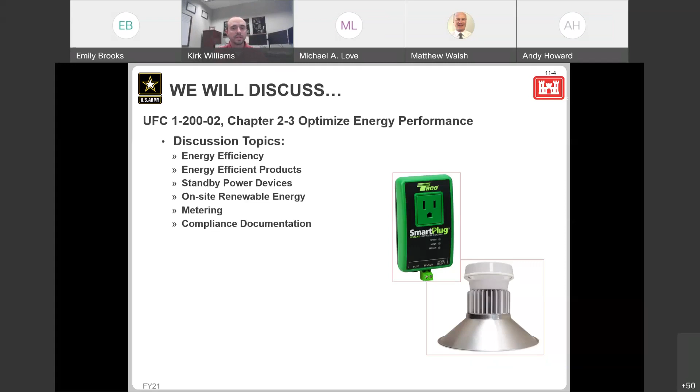Okay, so we're going to jump into the UFC, primarily Chapter 2-3, where we're going to optimize energy performance. So some of the topics that we're going to discuss today are energy efficiency, energy efficient products, standby power devices, on-site renewable energy, metering, and then also a real brief conversation on compliance documentation. There's actually going to be another presentation on documentation, so we won't go in a real deep dive on this, but there is some specific energy compliance documentation that I thought would be helpful to have as part of the energy presentation.

So some interesting facts about the government and our energy usage. Offices, hospitals, supermarkets, and other facilities like that account for nearly half of all the energy consumption in the United States. And that cost for those utilities is around $300 billion per year. And it's more than any other sector of the economy.

These are coming from Energy Star and FEMP, so some of the data is coming from there. Out of all the energy, often up to 30% or more is wasted through inefficiencies. Improving energy efficiency is the single largest way to eliminate waste. And with more than 350,000 energy-utilizing buildings and 600,000 vehicles, the federal government is the nation's largest energy consumer.

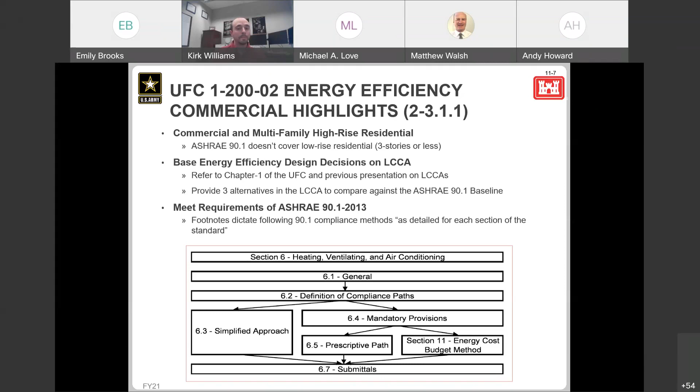Okay, so this is probably the one that people are most familiar with out of the UFC, where we state that we're going to design to achieve at least 30% energy consumption reduction. And then the statement that a lot of people are familiar with is if a 30% reduction is not life cycle cost effective, we're going to modify the design to achieve an energy consumption level at the highest level that's life cycle cost effective.

And so sometimes we're dealing with buildings where it's really difficult to get 30% savings. They're a really simple building, or they have a process that is difficult. It's a high bar for some facility types. And so we have the path around that says, if you can't hit this metric, then you're going to do your LCCAs, which we're already doing, and you're going to choose your method that gives you the most energy savings to try to comply with that.

I just want to point out a reminder from the ER on LCCAs and energy modeling that states where you have similar performance between alternatives, you select the most economical, as well as a reminder from the ECB on LCCAs that says when you're selecting alternatives for analysis, give a preference to features and systems with lower complexity and maintenance burden. So sometimes this can be a little bit of a gray area to try to balance all three of these.

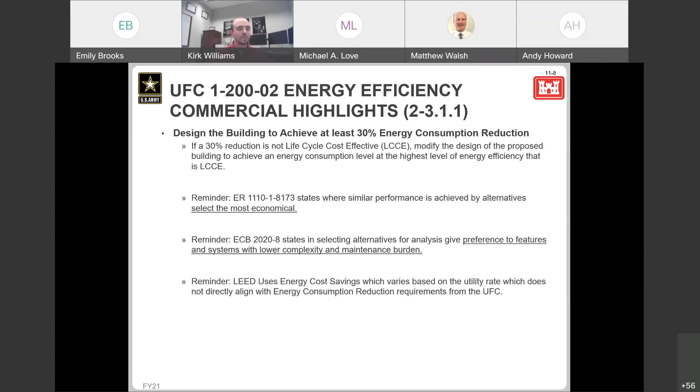So as we're continuing in the UFC here, a lot of people are familiar with this one. It says that we're going to use the performance rating method for determining our percent energy reduction over the ASHRAE 90.1 baseline. And so our UFC actually gives us an equation to use. So that's always fun. Just wanted to point that out for those of y'all that might be new to the federal government, that there is this equation here that when you're doing your UFC compliance reporting, you would use this,

which is more or less taking your receptacles and process loads out of it to kind of reflect a different value. This is another area where the government is going to differ from LEED. LEED is going to include your receptacle loads in the analysis. So there will be differences between the reporting of those two. So once again, I said you'll hear that about every slide here. There can be a difference between your UFC reporting and your LEED reporting.

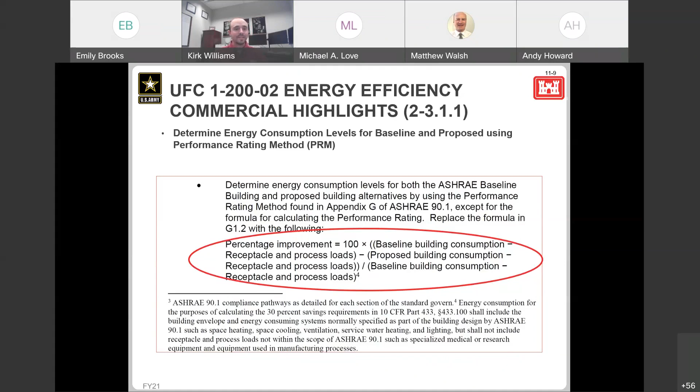Okay, so I think it's helpful when we get some real world examples. So I went into some old projects and I pulled some data out of Trace. Unfortunately, that's what you get when you give an engineer presentation, is you get data. So sorry for those that like pretty pictures. So on this one, just kind of wanted to point out.

So the top one is a report out of Trace. It's your energy cost budget / PRM summary. A lot of people are familiar with this, and I just highlighted the total consumption, noting that the units of this are 10 to the 6 BTUs, I believe. And so they're actually a pretty large value. And then the one on the bottom is actually the same energy modeling software output summary for LEED. And that's where it actually points out our proposed economic cost improvement over the baseline. So that's what would relate to our number of credits that we would achieve.

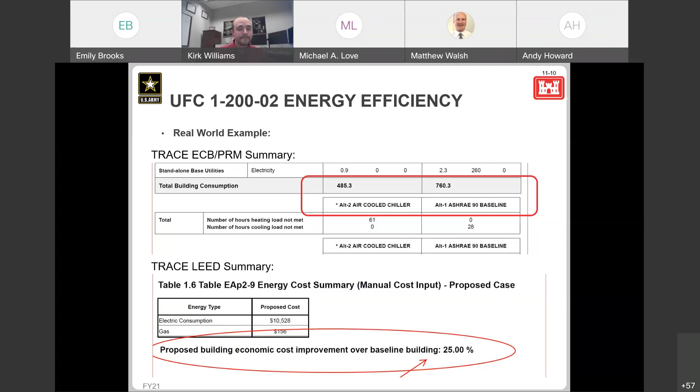So I went ahead and pulled, this is actually that ECB PRM report, the whole one. And I just went ahead and circled a couple of things. Here you would see where we have the receptacles. If you remember back to that PRM equation, we talked about receptacles getting pulled out in relation to the total building consumption. So to not get into the math, it wasn't real jazzy math. If you backed out the numbers, you would see that this building was, by the UFC method, 45% energy consumption reduction. And then with the LEED energy cost savings, we saw that we were 25%.

So this is where I'm really trying to drive home that if you're at a planning charrette or some other kind of function or venue, selecting that you're going to get 30% energy savings on LEED is going to be a very different output than what you might be getting from your UFC. So just because the UFC says you're going to be doing 30% reduction, or the maximum life cycle cost effective, doesn't necessarily mean you're getting all of those points with LEED. So talk to your energy modeler, talk to your mechanical, talk to your PDT.

Hopefully people are informed about that, but I've come into multiple projects in-house and AE where we kind of started with that assumption and then kind of had to be the bearer of bad news of, no, we're not going to get you 12 to 15 points or credits on this. We are going to be getting you more like 6, a lower value. And so that can be a big deal when you're planning your third-party certification compliance. So just kind of wanted to point that out there. Hopefully everyone's gotten that.

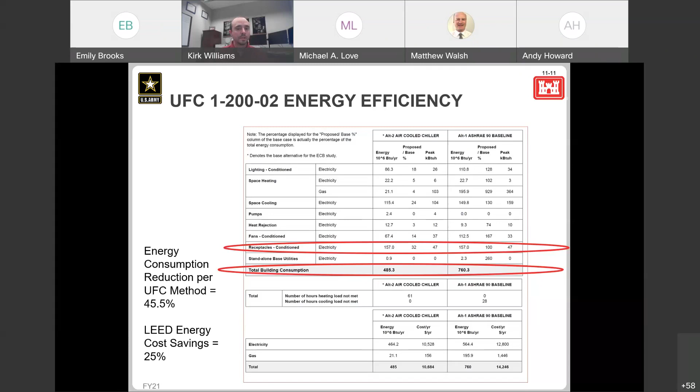Okay, so we're gonna keep diving into the commercial. So we're going to determine our consumption levels for the baseline and proposed using the performance rating method. So there's a little bit of a difference between this. Sometimes people can get confused with the performance rating method and the energy cost budget method. Those of y'all that live in energy modeling or 90.1 compliance have probably come across this.

Energy cost budget is a modeling method. It's actually section 11, and that's a method that you would use for showing compliance with 90.1. Appendix G, or the PRM method, is actually if you're going to show that you're achieving energy savings above and beyond 90.1. So they are actually different. There's some differences, as you can see on the statements that I put on here. The PRM method builds on top of the ECB method.

Those of y'all that have done any kind of energy modeling for LEED, they drive home compliance with Appendix G requirements. LEED reviewers are really good about making sure your baseline is fully compliant with Appendix G. They will give you plenty of comments if you fail to do that. We know firsthand. So just some things to note with that.

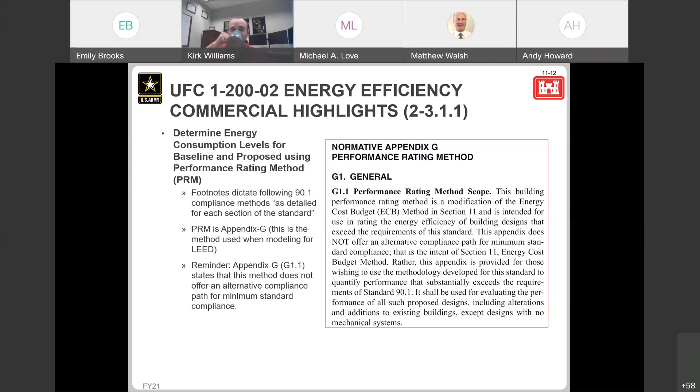So now we'll jump into a real high-level overview of the residential. We talked the UFC mandates for the commercial, so now we'll touch on the residential real quick. So to meet the requirements of the residential, and just a reminder, this is 3 stories or less, and typically involves a dwelling unit, which gets into your classification spaces. You're going to follow the International Energy Conservation Code. So we wouldn't be using 90.1 for this necessarily, because 90.1 says that it doesn't cover low-rise residential.

I just put a note in here that sometimes we get into a strange criteria crosswalk issue with large barracks that are 3 stories or less. So sometimes we have AITs, UEPHs, and things like that that aren't actually high rise, but are pretty large residential. And so you get into some strange comparisons when you actually start using the IECC, which is more geared towards low-rise residential. You can think a house, but you're dealing with a barracks that's hundreds of thousands of square feet, and it makes getting apples to apples comparisons a little difficult. So some of that might live out there for some of these.

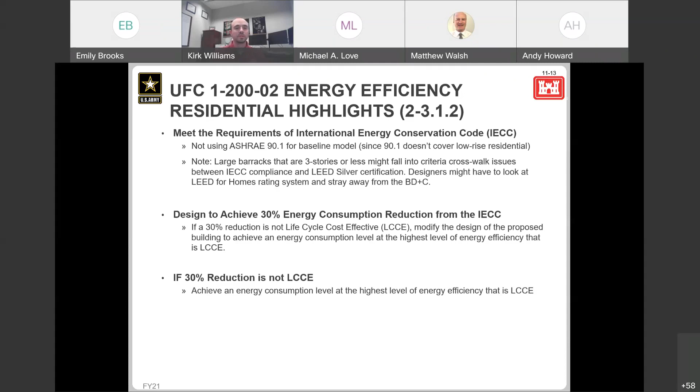So we're going to see a pretty similar requirement here to design to achieve a 30% energy cost consumption reduction, but we're going to be using the IECC instead of 90.1 on this. So pretty similar statement, just different criteria. Once again, we have the same caveat with life cycle cost effectiveness, where we're going to do the highest energy efficiency that's life cycle cost effective. If a 30% reduction isn't cost effective, then you're going to just choose the highest level of energy savings that you can.

Okay, so that was a real high level on residential. Next, we're going to talk renovations, and this one's kind of an interesting one as well. As a lot of y'all are probably familiar with renovation work, there's kind of an infinite amount of variety with the scopes on renovations. So to start with, the UFC says if you're replacing everything above the foundation, you must apply either the commercial or multifamily high-rise residential, apply the low-rise residential, and achieve one of the compliance methods previously discussed.

So more or less, it says if you're going to replace everything from the slab up, if you're going to rebuild this thing, you're going to follow the 2 methods that we used for the new construction. It makes a little bit of sense because you're getting into that deep energy retrofit kind of scenario. So that's what you're looking at. And then for all other renovations, you're going to choose one of the following options.

You're going to reduce your measured building energy use by 30% below a 2003 metric for the baseline, or you're going to reduce your building energy use by 20% below a 2015 metric. So you have kind of a difference there. Or you're going to reduce your modeled energy by 30% compared to 90.1. So that one looks kind of like what we had in our commercial there.

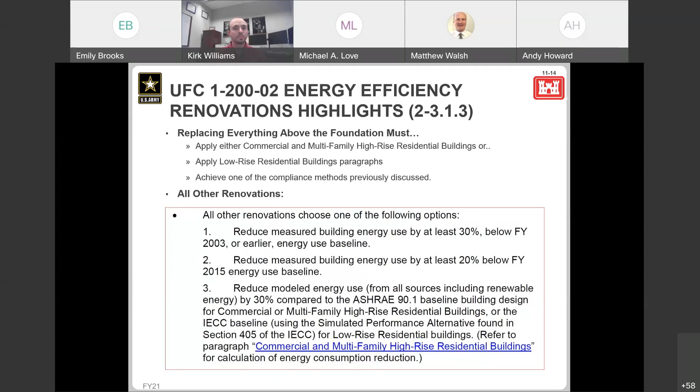Okay, so that covered most of the energy efficiency that a lot of people are familiar with. The 30% energy savings, the big key one that people think of when they think of the UFC and the energy compliance that goes along with it. Now we'll touch on a few of the other ones. So the first one, and this one might look familiar to y'all that attended the water presentation, is we're going to get energy efficiency products. So we're going to get products that are Energy Star qualified that meet the FEMP designation for energy efficient products.

So I actually put links on the slides here for Energy Star and for the product list from the Department of Energy for the FEMP. And then I thought this was kind of cool that broke out the federal government's energy and water use by consumption fuel type from 2020. So if y'all like to nerd out on data and graphs, I have those moments every now and then. The FEMP website has a lot of information on that. They also actually have some pretty cool tools on there.

I came across an alternative water source map. If you were there for the water presentation, we talked alternative water. And they actually had a tool that shows different alternative water source available locations. They have a water harvesting calculator. They have a tool for economic viability for PV, wind, battery. So there's some tools out there. I am wary to promote too many tools because, at the end of the day, our LCCAs are required by policy, and we have the requirements that are there.

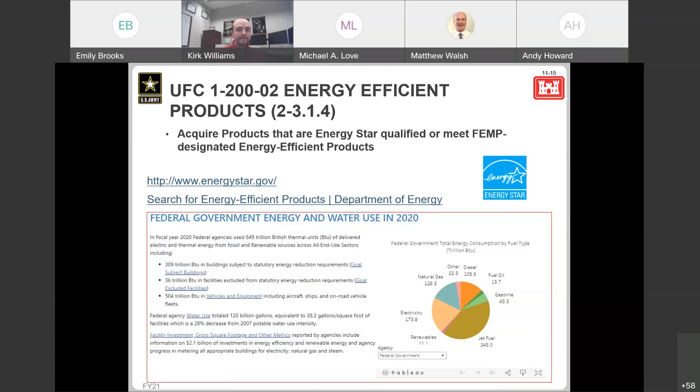And my mic, is it getting any better? Hey, can y'all hear me? Yes, sir. Okay, good. Sorry, I was using my work phone and my reception went to 0. Sorry about that. So let me get the presentation back up and we will jump back into it. Sorry for the technical delays. Okay, sorry about that. So hopefully y'all are with me and we can pick back up here. We'll take the technological issues in stride. Let me know if we have any other issues. Hopefully the Wi-Fi will hold out here and we won't have any other problems.

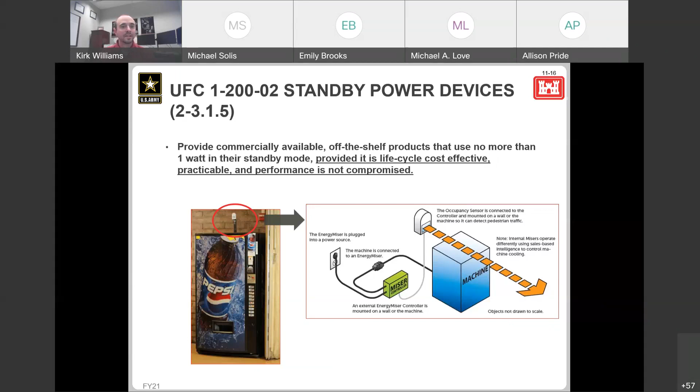So next we'll jump into on-site renewable. So this is one we're gonna park on for a few minutes. A lot of people probably have come across this. This is kind of like the 30% energy savings. There's a lot of content here. So our UFC says we're gonna provide on-site renewable energy, and we're gonna follow the IGCC, so the former ASHRAE 189, but we're going to do it where life cycle cost effective.

So that's where it's going to get interesting. We have this criteria that says, if you were doing ASHRAE 189 or IGCC compliance, you would normally provide for on-site renewables. And there's a variety of definitions that go with that. A lot of people think PV, but there are other renewable sources on site that go along with that. And then specifically, you get down into it, and it says for Army projects, if it's not life cycle cost effective, that you're going to plan on-site renewable energy systems for future installation of on-site renewable energy systems. And so that can get kind of fuzzy on how to implement.

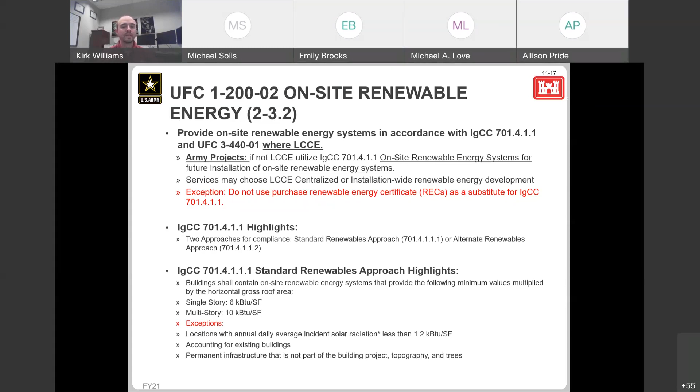If you're accounting for an existing building, and then permanent infrastructure that's not part of the building project. And so there's some exemptions in there. I'd say, probably look at that and weigh it with your project. There's some tools out there that'll help you figure out your average incident solar radiation. I'll say NREL. They have some maps out there. There's some other resources out there, so you can find that data for tracking on your locations.

So jumping into the other method now, the alternate renewable. This one's going to look pretty similar to the standard renewable approach. Your difference here is that you're only required to do a marginally lower value of on-site renewable per square foot. And what they do is they say you're going to provide equipment that meets certain minimum energy efficiency ratings. And there's an appendix, there's a water heater, and then there's the Energy Star requirements.

So a lot of these are probably things that we're already doing on our projects, because a lot of times we're going for LEED, we're going for energy savings for UFC compliance. So we may already be rolling some of these criteria in. So you might end up with a lower on-site renewable. So I wanted to point that out to y'all, that there's two different methods, and if you're doing really energy efficient equipment, you might be well served to look at this alternate approach.

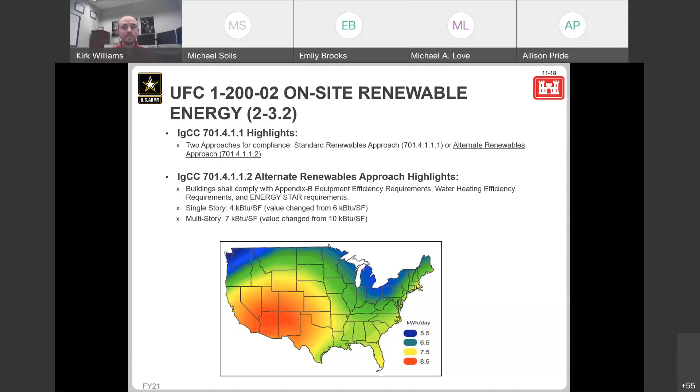I will say if you get the distinct privilege of getting audited, if you've only looked at 30%, they will ask you about some other percentages. So just recommend that. I believe our team looks at 60 and 80 to get some other metric points to compare for the analysis.

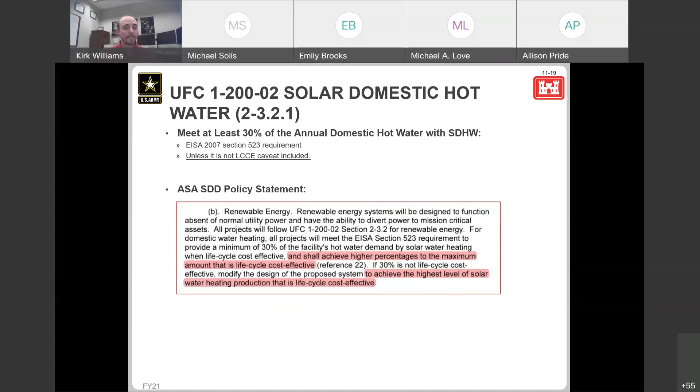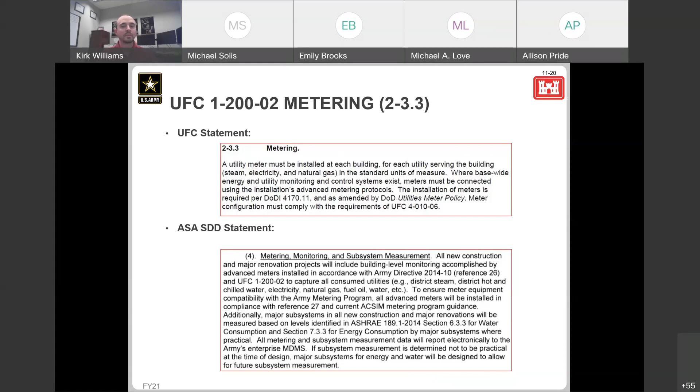I will say, with the metering, we should be getting what we call an advanced meter. So it shouldn't be a rotary dial. It should be something that can do some data points. It should more or less be a digital meter. There is the DoD meter policy. I put the link on the slide here. And then a big important point is cybersecurity. So don't provide a backdoor, don't let your building get hacked through the water meter. That would not be popular. So you do your cybersecurity, include that in there, and communicate with your installation on the metering and their policies and work to have that implemented.

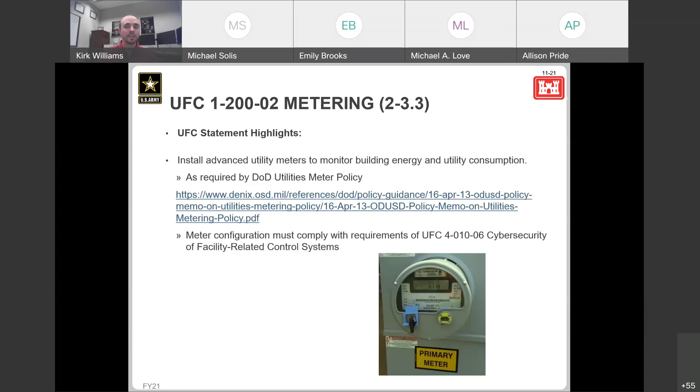So these are important things. If you're doing reviews, make sure that your AE or others are using energy modeling software that's compliant, and that you're getting your energy compliance analysis. I'll say if you get the SDD audit visit, they will be looking for this. And so this is a good reminder of a requirement for something that should live in your design analysis. So an easy review comment is, I cannot locate these documents, and it spells out what you should be looking for here.

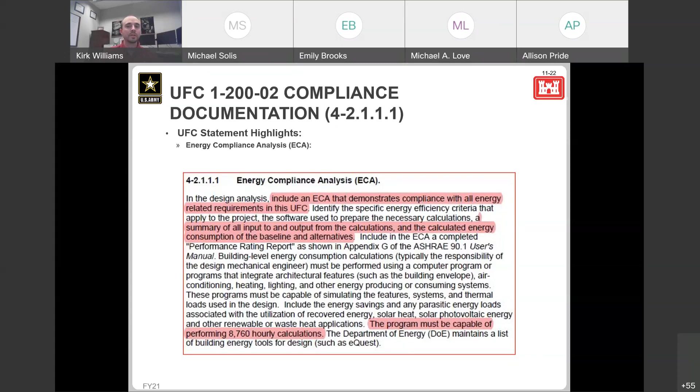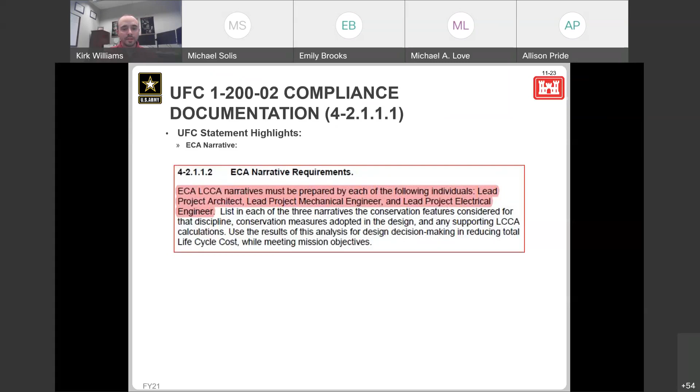So just to summarize, we talked through the energy efficiency that was in the UFC. We talked the policy on energy efficient products. We didn't get into examples. We talked the criteria requirements on standby power devices, pointed out that there's an on-site renewable energy requirement and some of the things that go along with that. We would have advanced metering through our UFC compliant project, and that there is going to be some compliance documentation on the tail end of this thing.